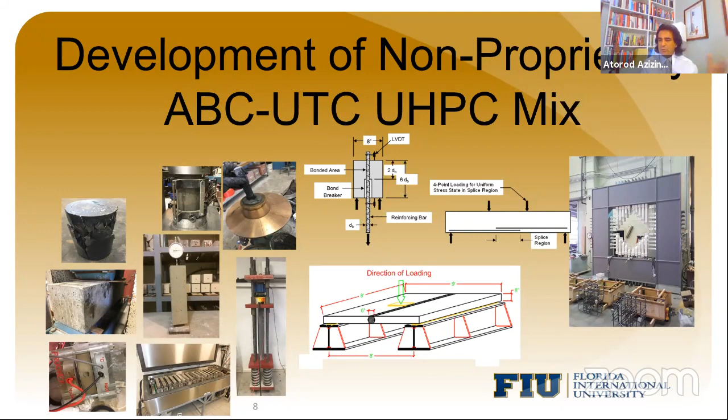This is just a chart showing that I'm coordinating this project for developing a so-called non-proprietary UHPC mix, or ABC UTC mix. The principal investigator is Royce Floyd, from the University of Oklahoma. I will give Rafael the PDF copy of my slides so everybody has it. Okay, no problem, Atorod. All right, thank you very much.

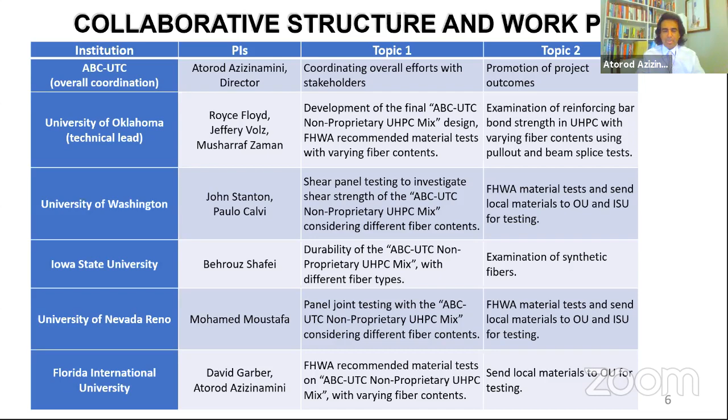You bet. So this slide shows who is doing what in developing the non-proprietary UHPC. There's a lot of testing being done—material testing, trying to optimize it, and so on. There are also different universities in our consortium doing structural testing too.

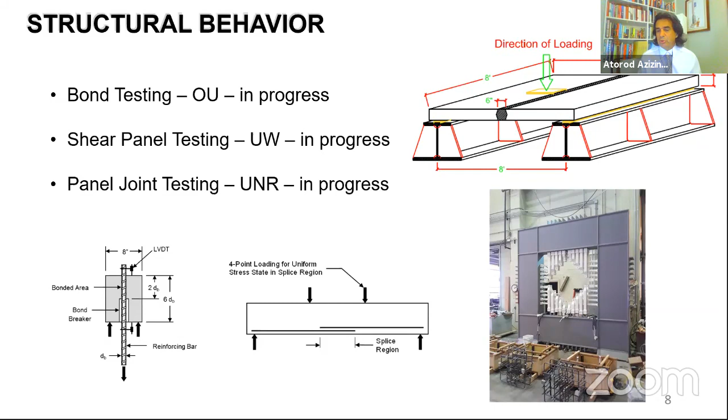So they are developing the mix, and in order to select the mix that really should be used, they're also doing structural testing, like for closure joints or a bond test and so on, and shear tests. For example, University of Washington is doing some shear tests. So the UHPC mix that we are developing is going to be available to anybody in the world who wants it, and we are making sure that its structural properties are adequate.

We are doing lots of durability testing, rapid chloride permeability, freeze-thaw, and so on. If you go to our website, you will see more detail.

If you're interested, for example, in how to make a UHPC mix, this kind of chart tells you, per cubic yard, how much cement you need, how much slag, silica fume, and so on. You can play with this, you can start with this. This will probably give you somewhere around 56 days, and probably 20,000 PSI strength. But if you want more than that, you need to beef up your amount of cement and silica fume. This is the kind of mix you can basically start with and play with.

And I can tell you the biggest cost is the steel fibers. Steel fiber is a major cost.

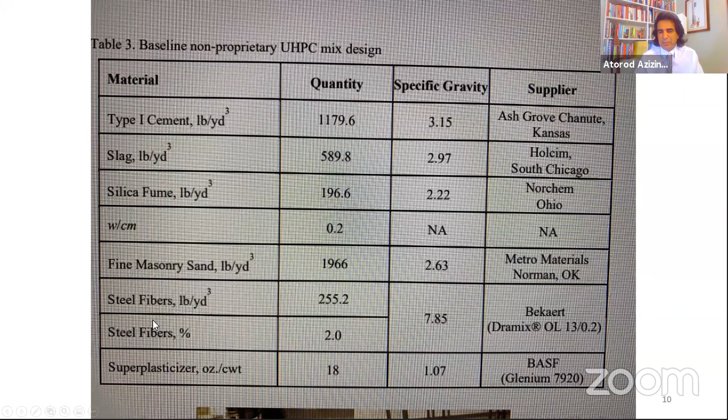The durability aspect is the main reason why we are using UHPC. It is so dense that nothing penetrates through this material, and that's the advantage. Also, it has tensile capacity, and after you form a crack on the tension side, it's not the end of the game - you can get strain hardening and so on.

This is a very busy slide, but I just want you to notice one thing: this chart is UHPC, and this chart is just normal strength concrete. The horizontal axis on both is the number of days the samples were exposed to salt water. The vertical axis represents the level of corrosion taking place. So after 450 days in the UHPC, you will see very small corrosion activity, but in normal strength concrete, it's several times that.

So UHPC's durability aspect is the main thing, and because in our bridge structures we do want a very durable material so nothing penetrates through it - and we've done, and lots of other people have done, lots of work with UHPC too - it's an extremely durable material.

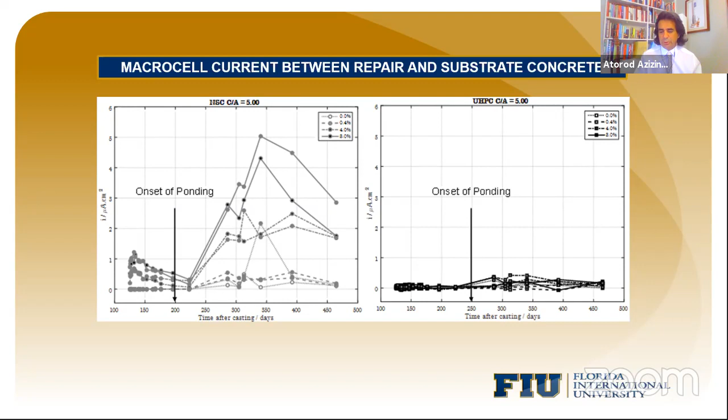Now let's come back and discuss the application. From this point on, we are going to discuss the application of the UHPC.

One of the areas of interest to us is if you have a prefabricated column and a prefabricated cap beam - like here, for example, here's a bridge, this is the column, this is the cap beam. You can prefabricate this and prefabricate this, bring them to the site, and then connect them together. Right now there are lots of connections available, and most of those connections are basically just making a hole and going through.

So if you make a slight mistake, and if everything doesn't fit, then you are in a world of trouble.

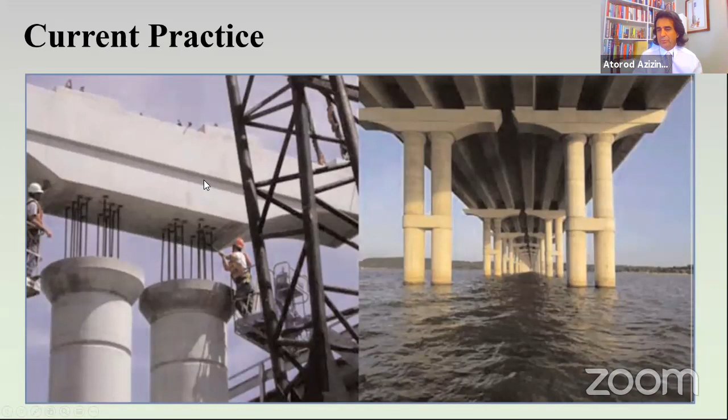So there are also these couplings that you can use in order to connect them together. Again, these are not cheap, and you have to make sure that everything fits - if it doesn't fit, then you're in trouble.

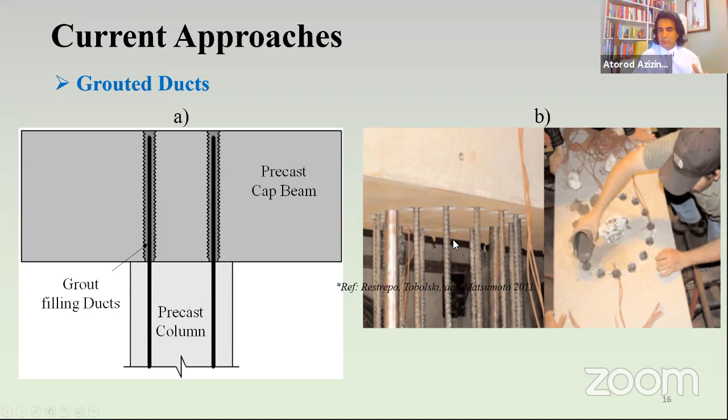This is the so-called duct method, where you make a duct, pass the reinforcement through, and then fill it. Again, tolerance is very important in this connection.

There's another one that we call a socket. So there's a pocket, and then there's a socket. Socket is basically you make a hole, and then you just insert the column inside of it.

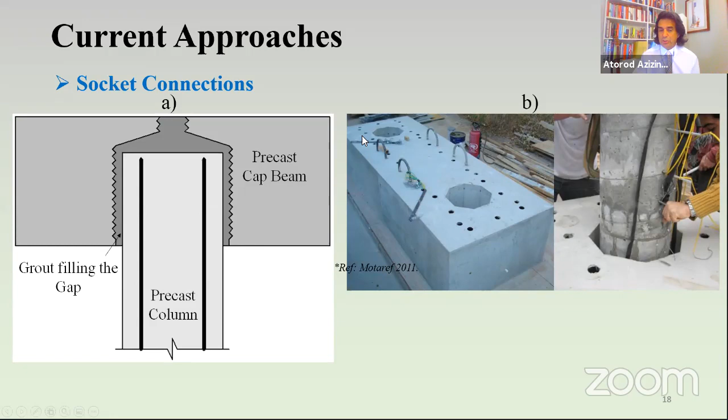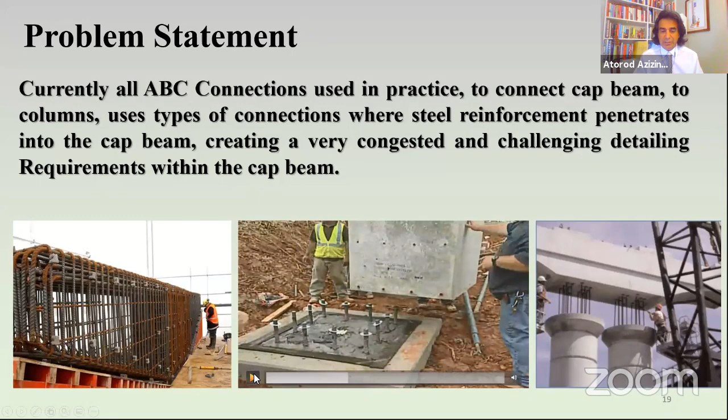Again, in these cases, you have to push lots of reinforcement to the side. For example, in real structures, if you want to put some kind of tube inside of that, it's very congested. It's not easily done. If you make slight mistakes and things don't fit, that's a problem.

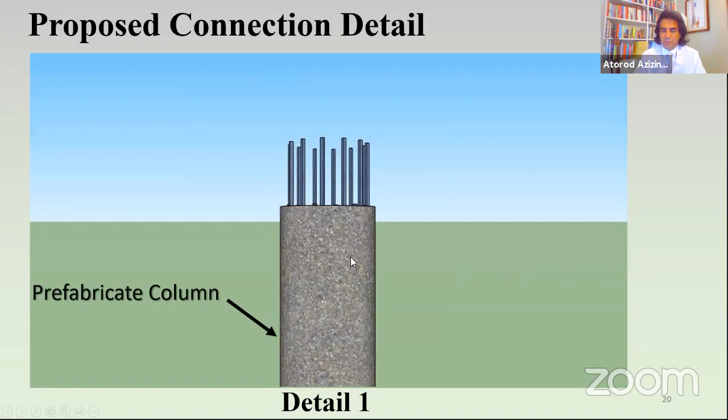So what we did, we said, okay, we are going to bring the reinforcement out of the cap beam, have your precast column, and you have the reinforcement, and then splice it with the UHPC outside. There are many advantages. This detail works for seismic and non-seismic, because in seismic areas this area is so strong that it remains elastic, and the plastic hinge forms outside that.

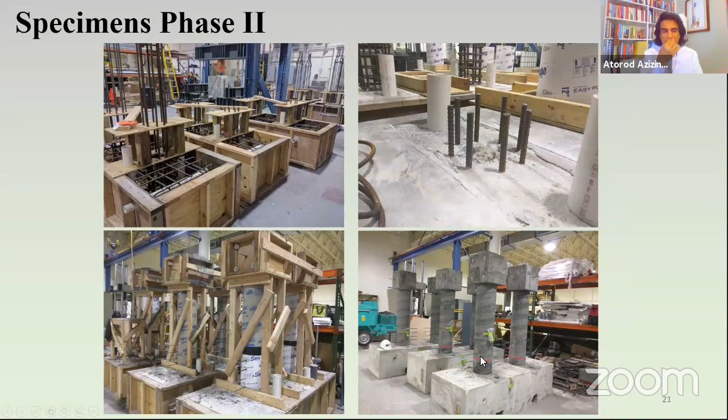So we did lots of testing. Here it is, for example, precast column, precast cap beam, and then trying to overlap them. So we tested, and damage is always outside the connection area, and that's what you want, right? Because you don't want any damage in the connection area, and this kind of detail achieves that.

Here is a number 5 bar, number 6 bar, and this is just normal strength concrete. So our design criteria is very simple. The length of the splice is only 8 times the diameter of the bar. So that's this length, the overlap, splice length.

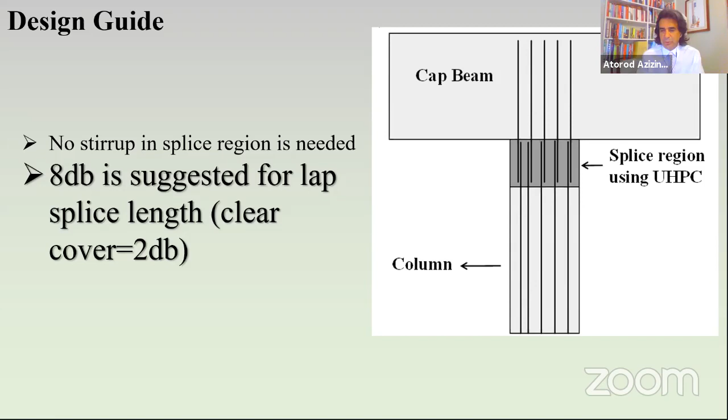The other thing is that now you don't have to worry about the tolerances, because you just connect them together and fill with UHPC, so you don't have to worry about the tolerance. Now we do have procedures on how to, in the field, hold the cap beam while you pour this. I'm not showing that here, but contractors can come up with many different ways. We do have one way that we have suggested.

Another big area that is really attracting lots of attention is retrofit. I'm pretty sure in Brazil you have the same concern, because there is not that much money to replace all the deficient bridges. We have to retrofit, we have to repair most of them. In the US, we have the same problem. You cannot replace every bridge that is deficient, every bridge that shows this kind of corrosion and so on. You cannot replace it, you have to retrofit.

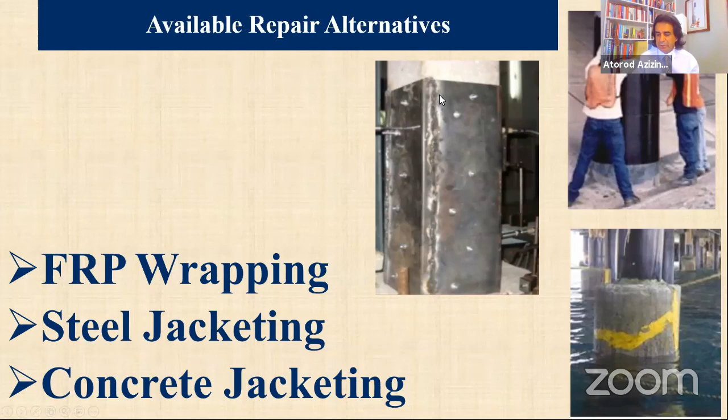So this is an extreme example. We can do a bunch of other things with UHPC, for example, let's say a column. Right now there are a number of different ways that you can retrofit columns, like wrap it with a steel jacket or concrete. But UHPC is really, in my opinion, the way to go. So we built many test specimens, and intentionally we introduced some damage. Basically, we cast the column, but then we left part of it uncast. In fact, we spliced some rebar, assuming that some rebars are going to be corroded, so we're going to have to cut it and then splice it.

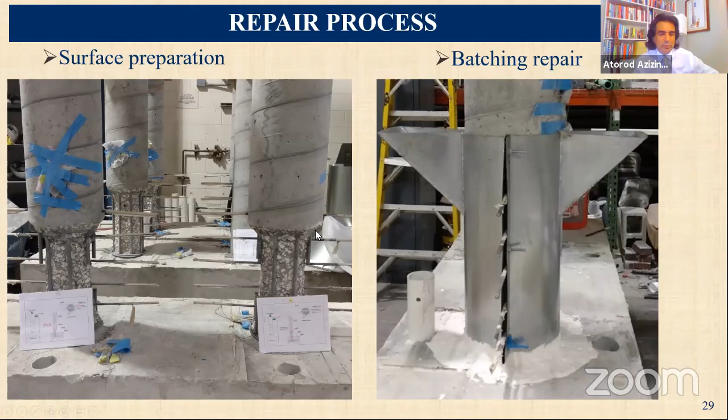Where the UHPC is touching the foundation, that UHPC is going to crush that concrete.

So the solution is that if you're retrofitting, you also have to retrofit maybe part of your foundation, or the slab that the column is sitting on, because that UHPC is so strong that when you apply load, it's going to crush that normal strength concrete. So you're going to be careful.

The other thing is you have to do some sectional analysis just to make sure you know what the moment capacity is here, what the moment capacity is there, and the moment capacity at the junction, so you can design it so that the failure is at the cross section that you want.

And it really doesn't take much UHPC thickness. This is a 12-inch diameter column. Only 1.5 inch UHPC causes the failure mode to go from the repaired area back to the top. So it's a wonderful material, and you don't have to use too much of it.

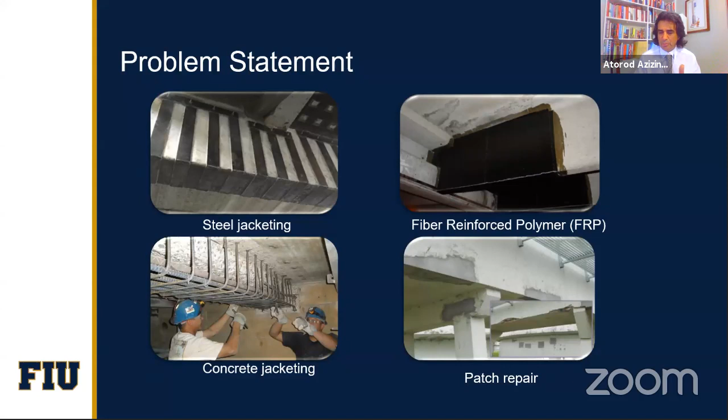So here is some of the stuff that you can use right now for retrofit. But forget about all that. Use the UHPC. Don't use the FRP. Don't use steel jacketing or concrete jacketing or patching, something like that. We've done lots of work, it's on our website, you can take a look at it.

What we did in our test specimen, we used sandblasting to get an exposed aggregate. Now, that's very important. If you want the concrete to attach to the UHPC, you need to expose the aggregate and then wet the surface for 24 hours. You can't just hose it right before casting the UHPC, that's not going to do the job.

What you have to do is get an exposed aggregate, then wrap it with wet burlap and keep it for 24 hours. That will allow the moisture to penetrate the normal strength concrete, because otherwise there is very little water in the UHPC, and that dry concrete is going to soak everything out, and you're going to get cracking. So that's a very important aspect if you want to use UHPC for retrofit.

We have not tested this one yet, but about a year ago, we took a T-beam. We said okay, now we're going to use 2.5 inches. We put some reinforcement, and the top is 2 inches, the side is 1.5 inches. There were two objectives: one, we wanted to see whether we can cast the UHPC and have it go all the way around.

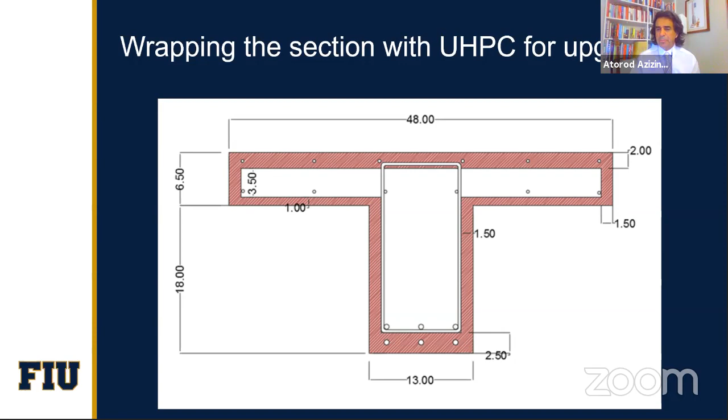And then after that, we are doing lots of corrosion testing, trying to see an intact bond between the UHPC and the existing concrete. We did one more thing, very interesting, because I wanted to see whether the UHPC that we're going to wrap can go through a small space.

So what we did, we built a formwork out of glass. And here it's a wet burlap, making sure that for 24 hours it stays wet. Then we put the T-beam inside the glass formwork, and we put the UHPC on one side to see if it goes all the way around. Here is the result.

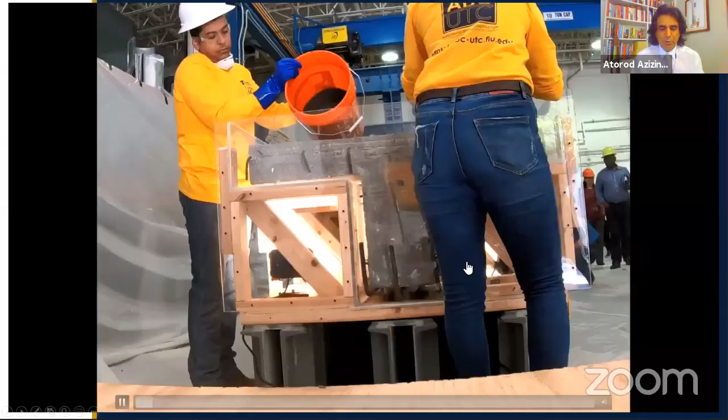In fact, we had two mixers, and one of them broke during the casting, so it took us 6 hours to cast this. It was actually a good test, because everything bonded together even though it took 6 hours to cast it.

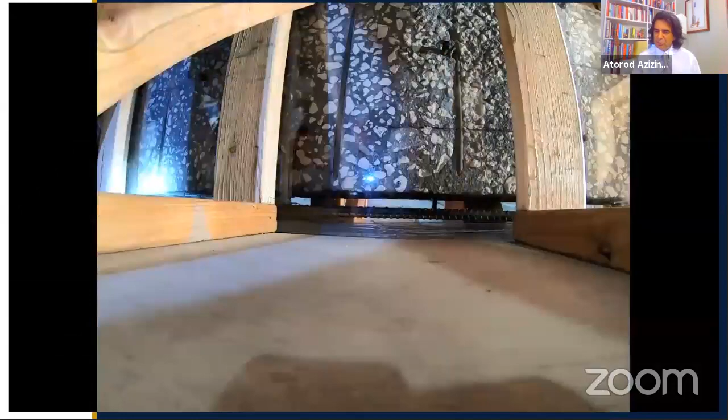So you see how everything is basically flowing. There was no honeycombing. The UHPC was going through that small space because in UHPC there is no coarse aggregate, it's all very fine sand, and because of that you don't get problems with honeycombing.

There's another very interesting feature: after we remove the glass formwork, the surface is just like glass. It's really wonderful stuff.

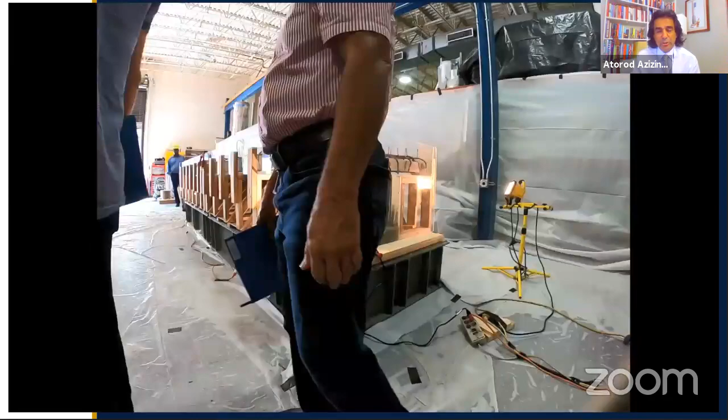So here you can see how the UHPC is coming up. We are pouring from the top, and this thing is just coming up very nicely. And that's the finished product - no problem, it's a wonderful material. You can wrap the whole beam in UHPC if you want to.

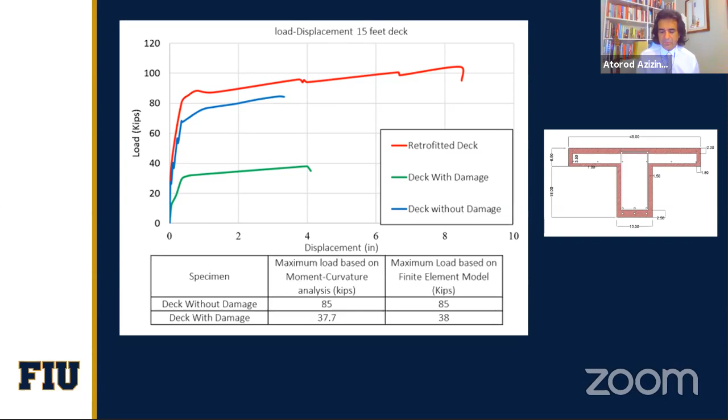So that's some of the retrofit work. We also have a very interesting concept when you want to build structures - I think I have it here. So what do we usually do? We have a formwork, right?

You build the formworks, put the steel cage inside, let it cure, and then you have to come back and remove it. That's a very costly process - it costs labor, it costs time, it causes interruption to traffic, and a bunch of other stuff.

So what we have done - it's a new technology we're developing - our formwork is made out of UHPC. So we have a formwork, let's say for a cap beam, or formwork for the column, and then you bring it, stack them on top of each other, put the steel cage inside, and then fill it with regular concrete.

Now you can also actually fill it with lightweight concrete. Why? Because if the shell is made out of UHPC, nothing penetrates through it. So therefore I can use lightweight concrete, I can make my section smaller, my total weight gets smaller, my foundation size gets smaller, and so on.

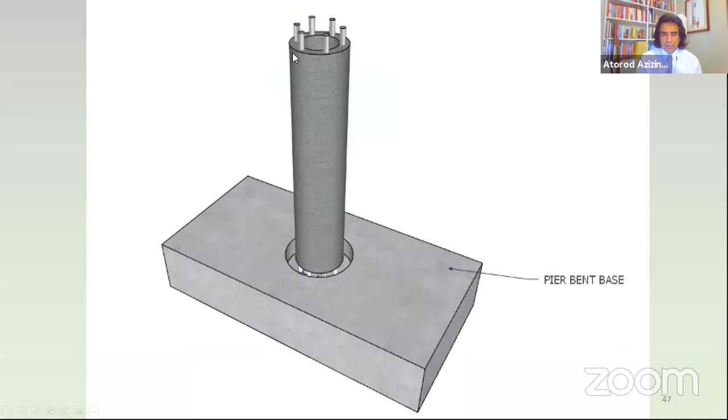So this is a conceptual cartoon that shows what we are doing. Here you can see, basically, the shell for the column, and then you can stack them and connect them, put the steel inside, and then fill it. So you don't have to build the formworks - you have something that's going to last many, many years, and you don't have to remove anything after you cast it, okay?

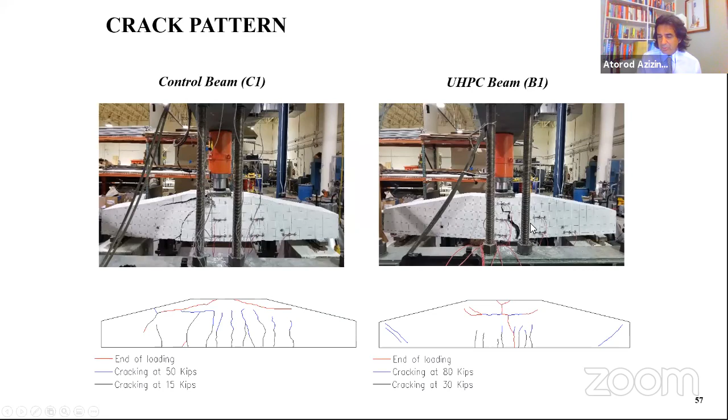We thought that ribs would give a composite action. That was not the case. As a result, we had one big crack in the middle, but still we had a higher capacity. If I look at this specimen from the bottom side, what you're seeing is the top. If I go to the bottom, you can see that the normal strength concrete is separated from the UHPC shell. So those ribs don't do the job.

You have to do something else. So for the material that you pour inside to get composite action with the outside shell, you have to use some mechanical devices. If you want to cast normal strength concrete against UHPC, you have to use a mechanical device. If you want to cast UHPC against normal strength concrete, all you have to do is have an exposed aggregate like I showed before. So there are two different types of problems: casting normal strength concrete against UHPC needs a mechanical device, and casting UHPC against hardened normal strength concrete just needs an exposed aggregate. Those are the two principles you have to watch.

And here, for example, in one specimen we built the shell out of UHPC, but then we put these mechanical devices, and then we put the steel cage, then we poured the concrete. And we tested it. Now we got good behavior - the UHPC shell and normal strength concrete behaved compositely.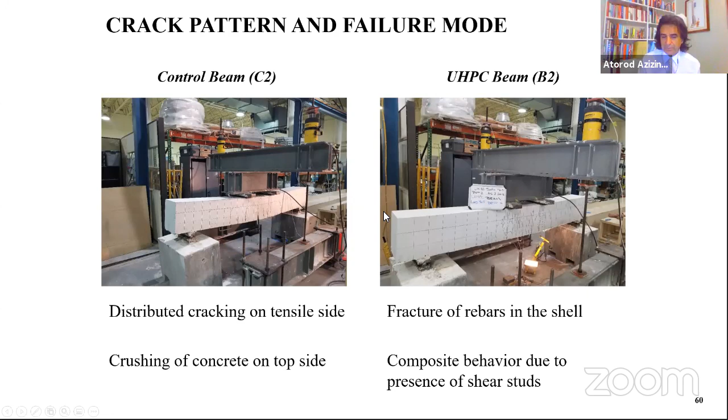And this is the behavior. This is a beam, same size beam. The normal strength concrete has a low deflection. This is a UHPC shell filled with normal strength concrete. You can see that you get a very ductile behavior, a much higher capacity, and so on. So I reached 60 kips versus about 35 kips in this case.

So that's it. This is what we call ABC - an accelerated bridge construction concept, because you bring these shells to the site, stack them on top of each other, and fill them with concrete. There's no formwork, and there's no maintenance because UHPC doesn't let anything go through it. So it's a wonderful way of doing it.

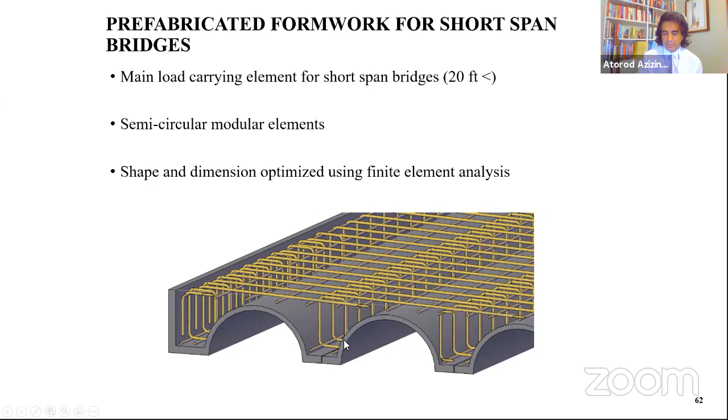We have some solutions, for example, for short span bridges. So you build a formwork in this shape, and then you can bring these, put them side by side, put the reinforcement in, and fill it with concrete. We built some of these modules, filled them with concrete, and then tested them. Everything works fine in this case.

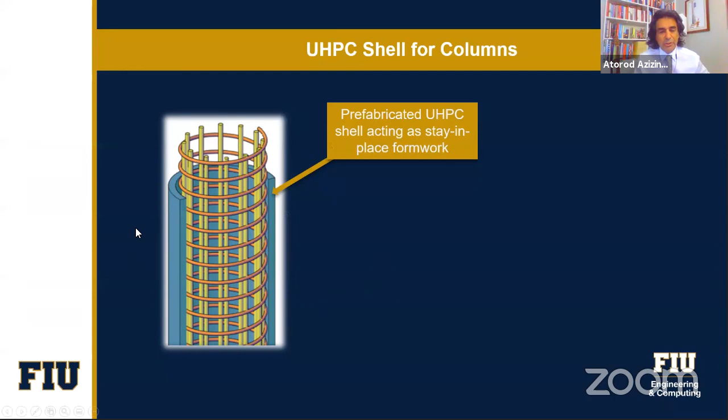So the other thing, with this concept of the formwork being a shell, we played around with the UHPC for the column. What we do is we have the shell made of UHPC. You put the reinforcement, put the shell on top of it, and then fill it. And then we have some details for the connection of how to connect this to the foundations.

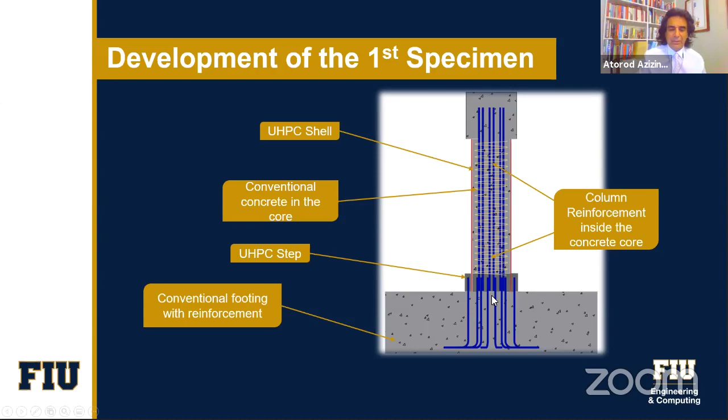Basically, the reinforcement comes out like this. And then the reinforcement that's inside, and then there's a ring that's made of UHPC. That's how you basically connect the shell to the foundation. Here, as you can see, in one of the test specimens, the reinforcement is coming out, and then there's going to be reinforcement inside, and then they're spliced here.

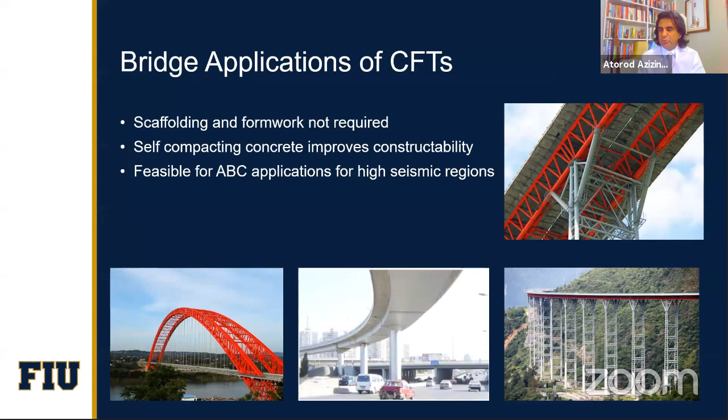Now, if you have a long column, it will be difficult to make a very long UHPC shell. If you have a long column, what you can use is concrete filled tubes. So steel tubes filled with concrete, connected to the foundation using shear studs and these rings right here.

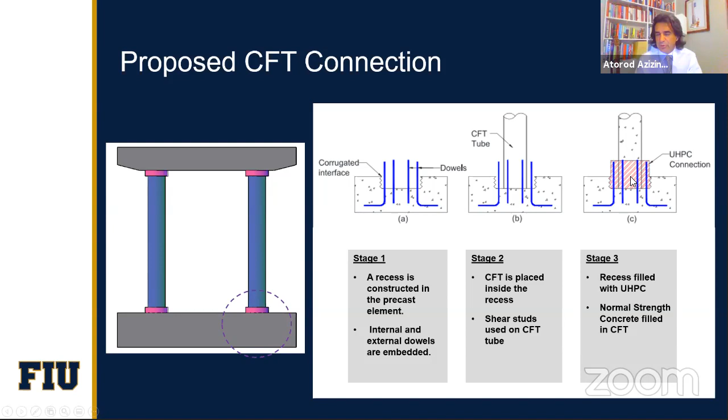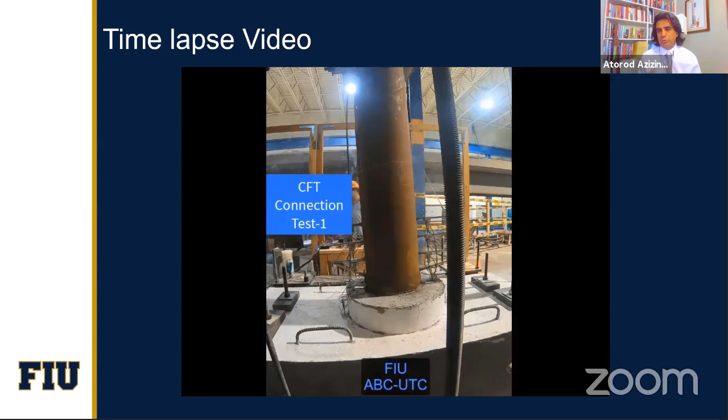So if you have a very long column, 20 meters or whatever, just use steel tubes, but then you can use a UHPC shell for a cap beam. And here's another one.

These were tested, fortunately, before COVID-19, because right now we are in the lab working, but we have to have no more than 2 to 3 people at a time in the structures lab. So it's been kind of disruptive for us.

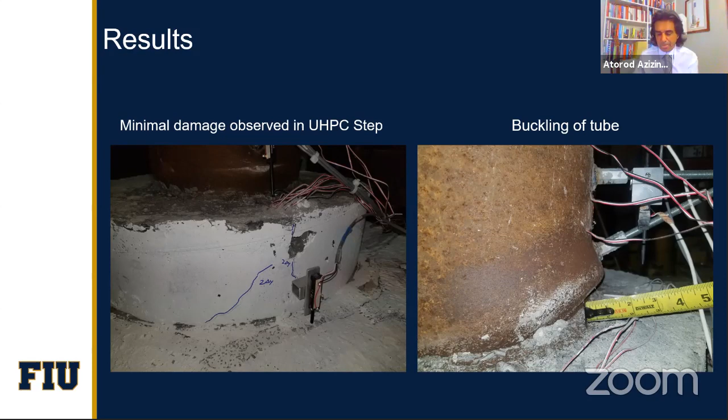And this is it, basically. So the connection works. Again, everything we do, all the connections, is connecting everything using a UHPC. That's what I'm saying - even though the material is expensive, you don't use too much of it, you don't need to. Here is some shots showing the failure is right outside of this connection area.

Every day we try to find some applications. So in the US we have lots of bridges that have used timber piles. I don't know in Brazil if you have it or not. Rafael, do you guys have lots of bridges with piles using timber piles, wood piles?

Yes, we use a lot of wood here in Brazil. For the columns too? No, for all the bridge. In the outback part of Brazil, like Pantanal, or in the center part of Brazil, some roads have bridges that just use wood. Okay, good. So stay tuned Rafael, because I'm going to be asking you some questions too - so pay attention, don't fall asleep on me. No problem. I know Rafael for many years, so that's why I'm teasing him a little bit. I wouldn't joke with anybody else, but I know Rafael, so he knows me, we play with this. No problem at all.

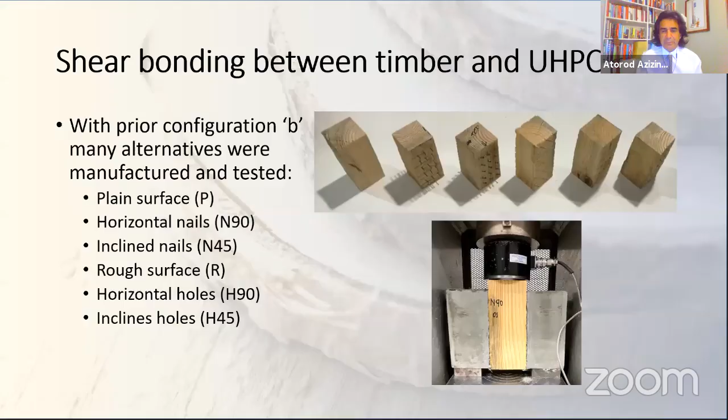So we've done a bunch of tests, trying to put the nails at different angles, do an interface shear type test. We've done a bunch of stuff, but our conclusion is that the best thing is just to put some soft material, wrap the timber pile with the soft material, and then cast the UHPC. Then you should be fine. In the US, the states that have timber piles are very interested in this, because this is providing us with lots of good options, effective options to retrofit some of these bridges that have timber piles.

Now shifting, there's another thing in ABC, accelerated bridge construction, the barrier system. This barrier system on the side of the roads, that's important. So we have developed a connection detail. You can prefabricate this much of it. The deck is already there, already cast in place or precast panels, and then you can connect them with the UHPC. I don't have lots of details, but if you go to our website, you can see the details. The gist of the story is that we have developed a really neat connection detail that you can connect a precast barrier system to a precast deck system with the UHPC.

This one is really interesting because the UHPC is going to be a little bit above the deck, and that's what you want, because during snow removal, if you don't have this area, the water can penetrate at that junction. So you have to have exposed aggregate here before you cast the UHPC, and that area is going to be sealed because this material, nothing penetrates through it. There's a lot of durability problems if you use normal strength concrete, but with UHPC you won't have that. So this is a very interesting solution, and in fact this one is not updated - this area actually goes all the way to here.

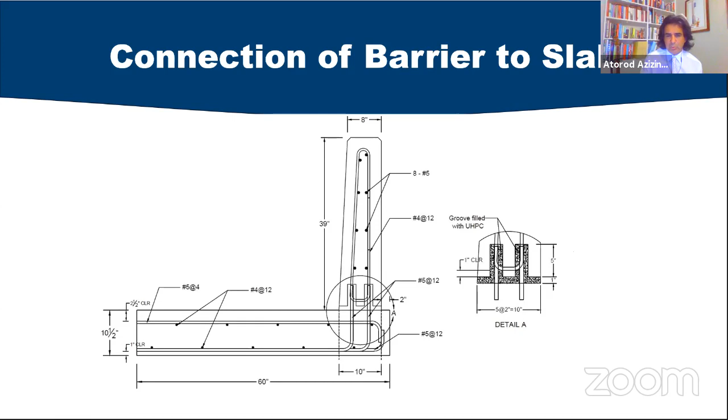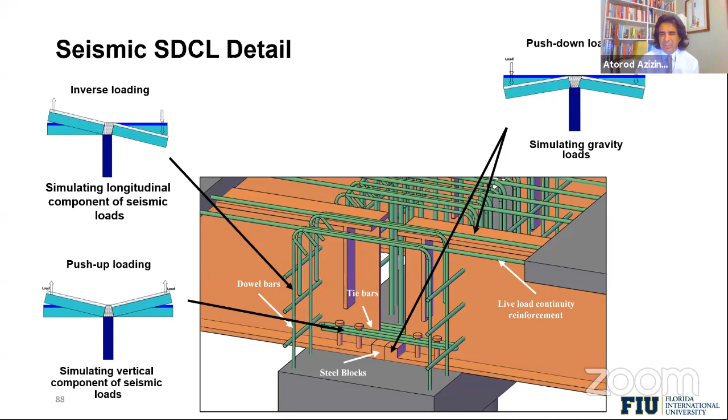If you go to our website, you will see there's much more information on this. Let me skip that - I'm not going to say much about this right here. Some of you have seen, for example, there's this steel bridge system that is called simple for dead, continuous for live load. It has a very complex detail for seismic regions, and we are replacing all that with the UHPC. I have one PhD student working in this area, so I won't say too much about that. If you're interested in this system, I can provide you with more info, or you can look at the website.

All right, now let's look at the future. Now what I'm going to tell you, it's not science fiction. The robotics in bridge construction is coming fast. In the US right now, the military is spending billions of dollars on using robots for construction - they take raw material to the field and then they print it.

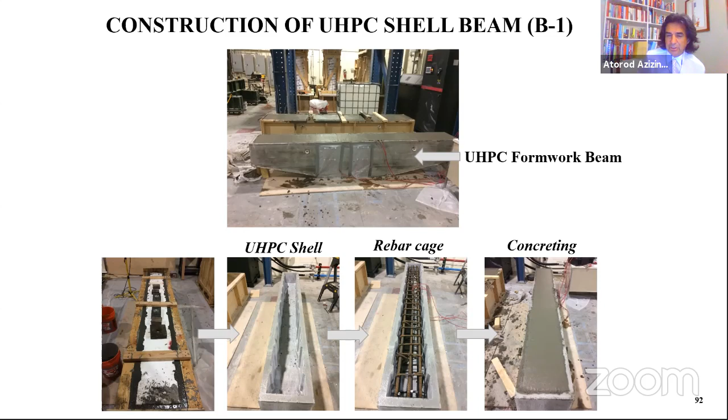What we are doing now is that UHPC shell that I told you about. Now imagine your formwork is made of UHPC. Now imagine one step further - we are going to print it with robots. Now you're taking the labor out. It's going to be really fantastic. So what we have done...

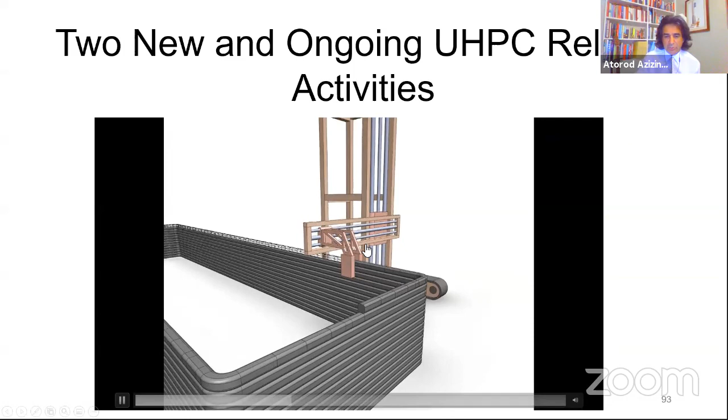Here is a kind of cartoon, but this is a reality - we actually have the system. The idea is that we cast these things layer by layer. Let me show you how we deposit this. This is a chute - the UHPC comes over here, and it's a layer by layer fabricated construction. There's a sheet over here, like a cooking sheet, that prevents the UHPC from sticking to the side. You can't see it, but there's a plate here that heats up to about 120 to 125 degrees Fahrenheit. So as we move along, let me see if I have...

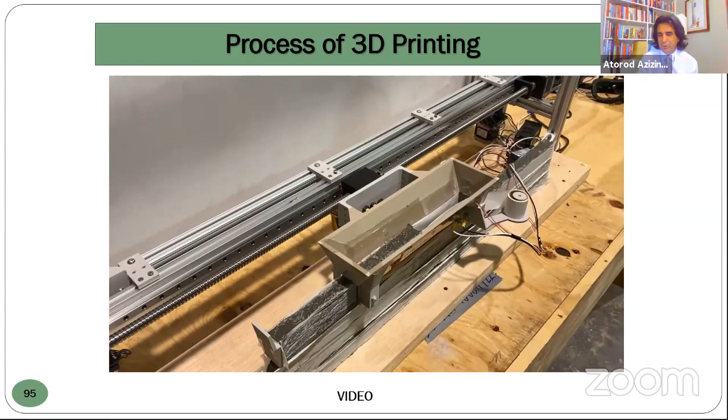As we move along, there's heat over here, and that heat makes the concrete harden faster. This is a small model just for the exhibit that we have. We are not there yet for commercial use, but it's coming. It's not brain surgery, but this application of robotics is coming really fast.

Over the next several years, we are going to be focusing on using robots to build components of the bridge, because this printing is well suited for accelerated bridge construction, since you can print these large pieces on site. Here's the advantage: you cut the cost of transportation. There's no reason why we cannot print these elements near the final site of the bridge.

So you don't have a transportation cost. You can use local forces, you can use local material. Imagine that—it's not reality right now, but it's coming fast. My feeling is that within the next 10 to 15 years, we are going to be there. Imagine you just ship these robots, and you have the material in there. They can mix it, and they can print it, and there you go with the UHPC shell. You've got the formwork, you stack it, you fill it with the concrete, and you're done. So this robotics is coming fast.

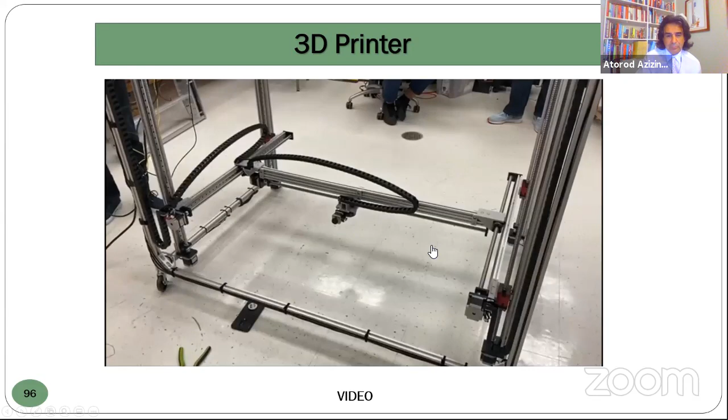Another thing we are working on right now—you've probably seen shotcrete—we are developing robots that can go inside the pipe. Inside the pipe, it can detect where the crack is, or just put a liner, a UHPC liner, moving along the length and then applying the UHPC or shotcrete. This shotcrete, I think, is going to be one of the main applications of UHPC.

It's even used for bridge overlay. Imagine I have this kind of problem—now imagine if I go back with the shotcrete, I just spray it, just like a hose, sprayed.

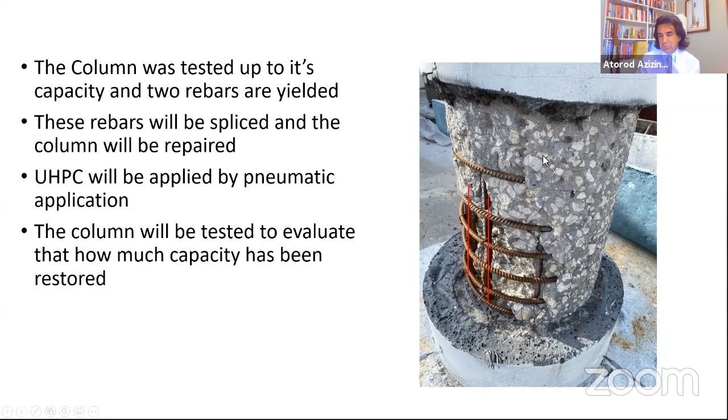We have developed a mix that is suitable. We have this specimen—in fact, we were supposed to do this back in May, but because of COVID-19 it was postponed. We are buying a device so we can spray. We're going to be spraying the UHPC on these specimens, and even some of the columns that we tested for retrofit, we have ready. Then we're going to spray the UHPC and test it again to see what happens. So shotcrete is one of those things that's coming fast.

They are looking at this more from a business standpoint, acting like this thing is so difficult to do. It's not at all. The shotcrete with the UHPC is a simple thing to do, not that difficult. We are working in that area, hopefully that should be available soon. I think that application is for retrofit, because remember, we don't have that much money to replace every bridge, whether in Brazil, the US, or everywhere. This shotcrete is a wonderful way of basically trying to use it for retrofit.

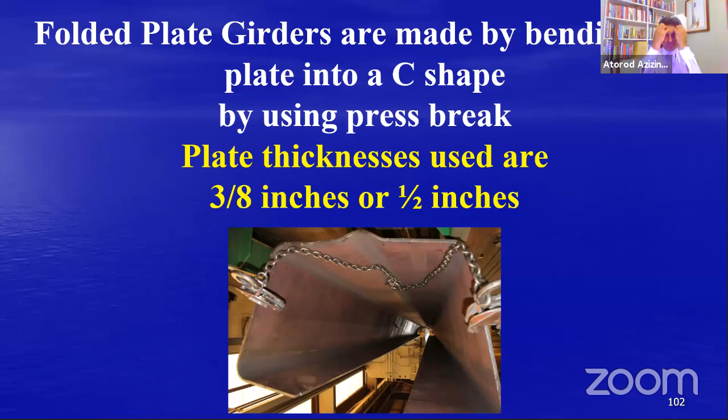I wanted to share with you - I think Rafael knows about this system called the folded plate technology, but what Rafael doesn't know is that now we have a second generation of these things. This system is for ABC. So what you do is you take a piece of plate, you bend it to a C shape, okay? This is proprietary, patented in the US, and if anyone is interested, we can help them implement it. Then you use the brake, basically press brakes, to bend these plates. The bottom is open, so it's a C shape.

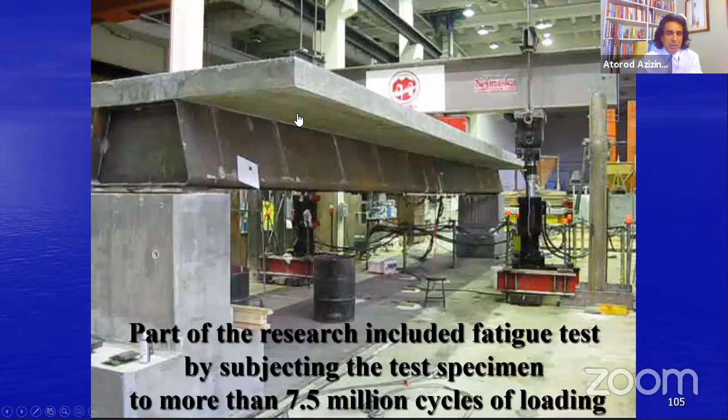And then you cast a deck on top of it, and then you ship several of these to the site and put them side by side, for example. So far there's about 12 of them across the US that have been used. But up to now, everything is limited to 60 feet because the press brake is limited to 60 feet, okay.

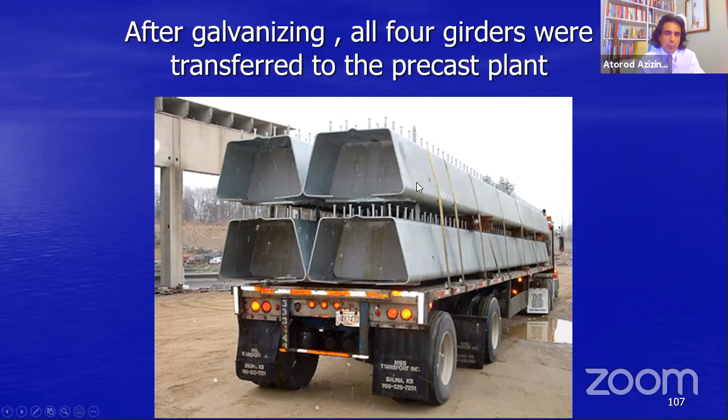So you bend the plate, galvanize it if you want for water, for corrosion, and then you cast it, you ship it to the site. You can build the formwork, cast a deck on top of it, and then ship it to the site. You can pick it up with a crane, very light - it's not that much weight - and then you put them side by side like this, and then you join them over here. We have a much better closure joint detail nowadays.

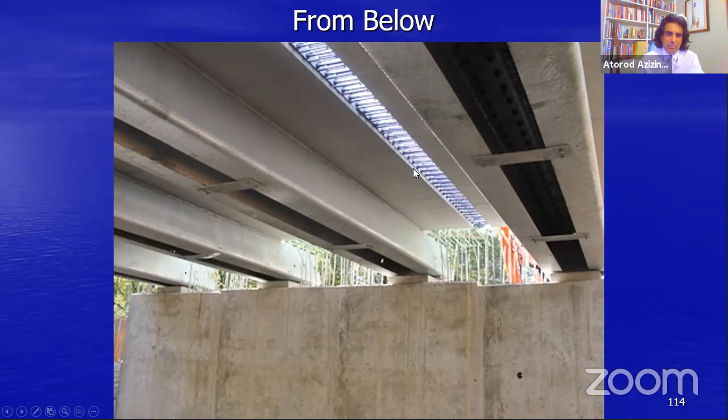This is the first one that was used in Uxbridge, Massachusetts, back in 2011. It was opened to traffic in 2011. But nowadays there's 12 of them in service with excellent performance.

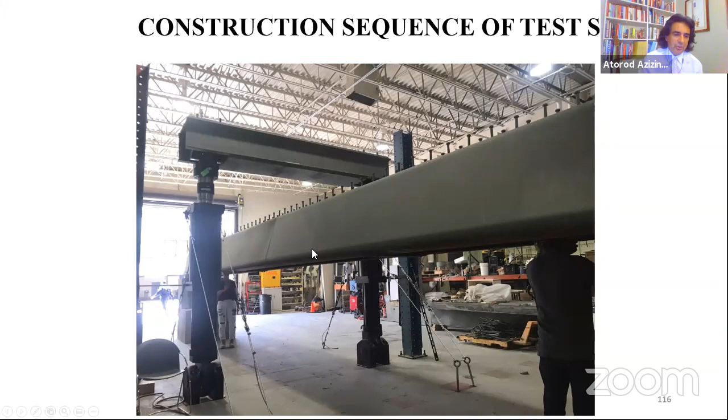Now, the second generation - up to now, the maximum length of this thing was 60 feet. Now we have developed a connection that we can connect together, and we can go all the way to 105 feet. Here is a specimen that we built - no, this is not 105 feet, we wanted to test the connection. And then we did a cyclic testing, you can see.

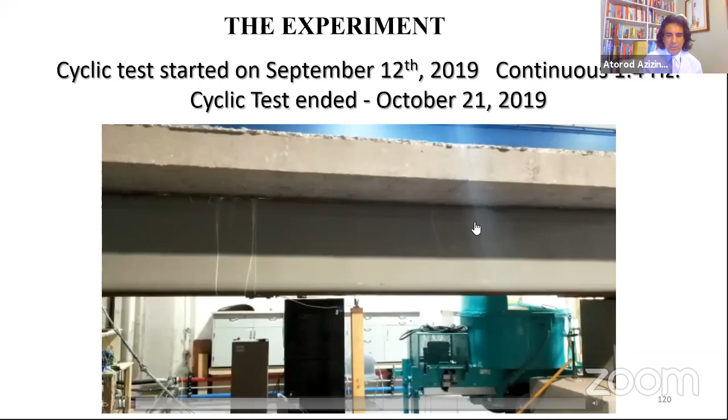Now, this one was almost, I think, 5 million cycles. We applied 5 million cycles. We started the test on September 12, 2019, and finished it on October 21st, 2019, basically 24 hours a day, that the specimen you see down here was being subjected. Each time the ram moved up and down, that simulated like one heavy truck passing over.

All right, so anyway, that system is just again, to be fair to the steel, we had that. I showed the system for shortest span bridge, for simplest span bridge, okay.

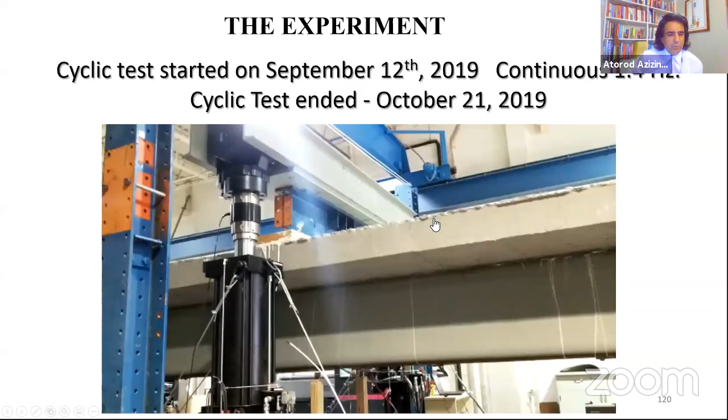And I think finally what I have before, I wanted to show this one. This is a technology that we have, and I believe you guys have the same type of problem in Brazil too. Rafael, you do have bridges that you worry about how to inspect them for corrosion, right? Especially when the steel is inside the concrete, correct?

Yeah, okay. Well, if you have that problem, we are working with a colleague of mine in Germany. I've been working in this area for 20 years, and my colleague in Germany has been working 30 years. So 2 years ago, we decided to join our forces, state-of-the-art technology to inspect the status of a steel strand embedded inside the concrete. Now, this technology - we are not really publishing all the details, there are secrets of the trade, and we are discussing right now with the university to form a company, and we are going to be providing a service.

There's many states in the US that are really interested in this technology. So it could be a parking garage, it could be a bridge, segmental concrete bridge, pre-stressed concrete, anything that you worry about. You say, okay, what is the status of the steel inside the concrete? If you are worried about that, this technology is for it.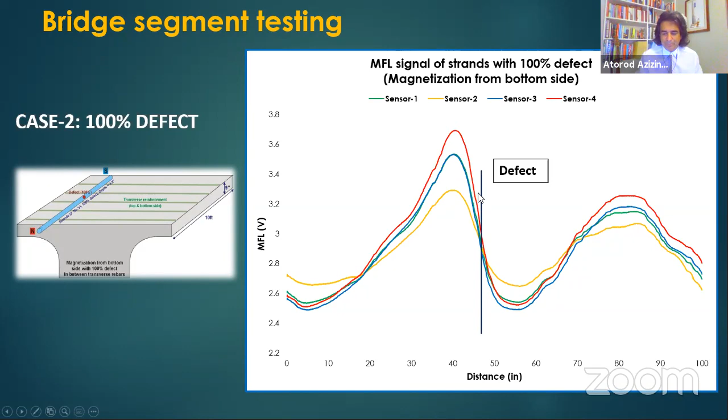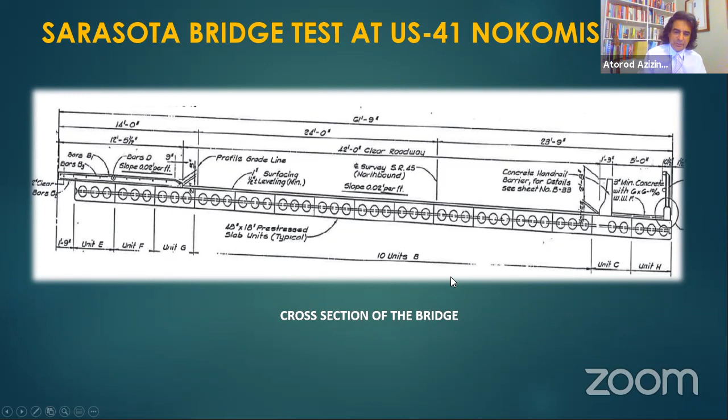There was a bridge that we just recently tested, and we are going back actually August 13th or 14th, we're going to test some more. This bridge is made of, along this length, these modules that you can see. This goes along the length, okay? These modules have a post-tensioning rod that goes transverse. This is perpendicular to traffic. Traffic goes toward the page, and then the post-tensioning rods are in the transverse direction.

So the post-tensioning rod goes along the transverse. A couple of them actually were ruptured, and we are able to basically say exactly where these things are.

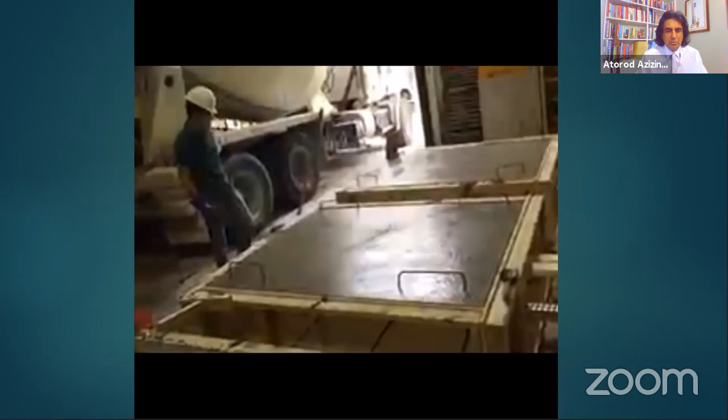Now, what we did recently, we built a full-scale model of this bridge, a segment of it. We built a full scale, and 3 of them. We put all the reinforcement that there is, all the reinforcement that there is, and then cast the concrete.

And then put them side by side. This is it, this is like the traffic goes this way and the post-tension rod goes this way. It's a full scale. You see over here, one of the holes has a metal duct and the other one doesn't. And we put the holes in different locations so that we test our technology.

Now, let me show you some of the results with this. So we put some post-tension rods, but we put the damage, we basically cut the rebar for 4 or 5 inches, simulating the corrosion. And by the way, cutting the bar section versus it just being corroded is the same thing, because when it's corroded, you have an iron oxide, which is non-metallic, so it doesn't make a difference. But let me show you the results.

So imagine now I'm going to put a post-tension rod, and I'm going to put some damage, intentional damage, on the post-tension rods.

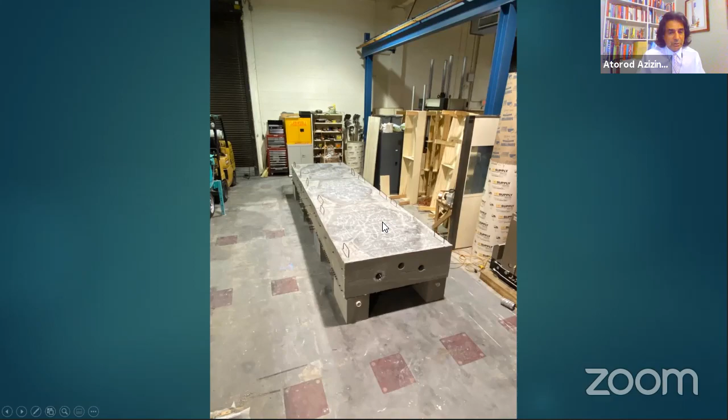And here's the signal. I mean, you cannot get any better than this. We are able to exactly say where it is. So this technology is applicable to both, let's say, parking garage or any steel element that's embedded in concrete, and you want to know what the status is, this technology is available.

I wanted to show this one because I know that Brazil is dominated by concrete structures, not so much by steel. And corrosion is the main problem. There are lots of collapses that take place because of corrosion.

The bridge that collapsed in Italy a couple of years ago, that was because of corrosion. And it happens more often than what you think. I think we are going to see problems with our bridges across the world failing because of the corrosion. And this technology is really state of the art in the world.

There's nobody else doing this. What we have solved is how do you section the structures and how do you zoom into the area that you want and wash out the effect of the mild reinforcement, okay? And this is it. You cannot get any better than this. I'm seeing exactly what it is.

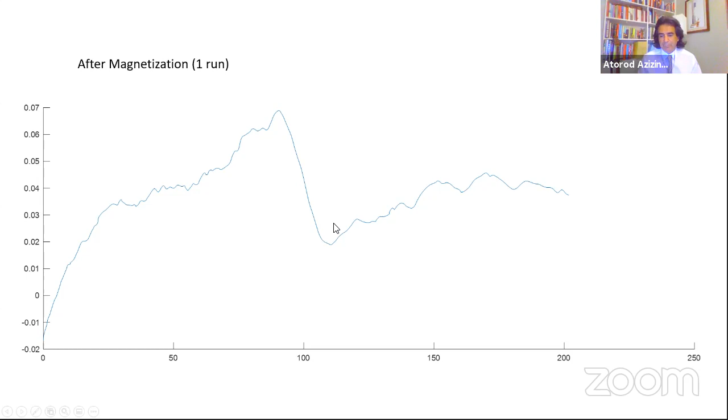And if I take the x coordinate of this point, x coordinate of this point, subtract that, that's equal to the thickness of my bridge section. So anyway, that's the end of the technical part.

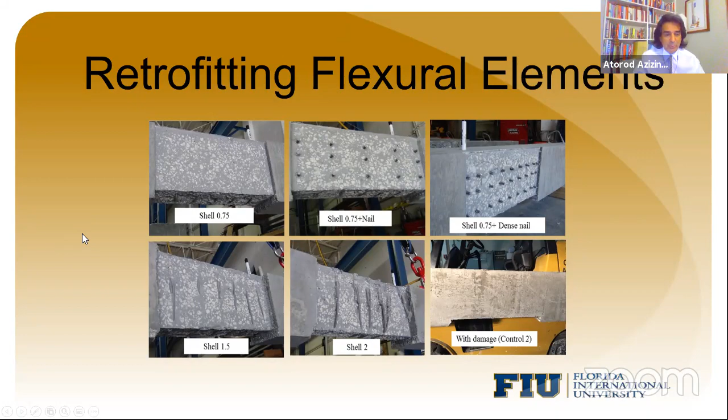This right here, okay? For example, here you wrap it with the wet burlap. So this was the concrete. You wrap it for 24 hours. You have to make sure that the surface condition of the normal strength concrete has exposed aggregate and is also wet. And then if you do that, then it's fine.

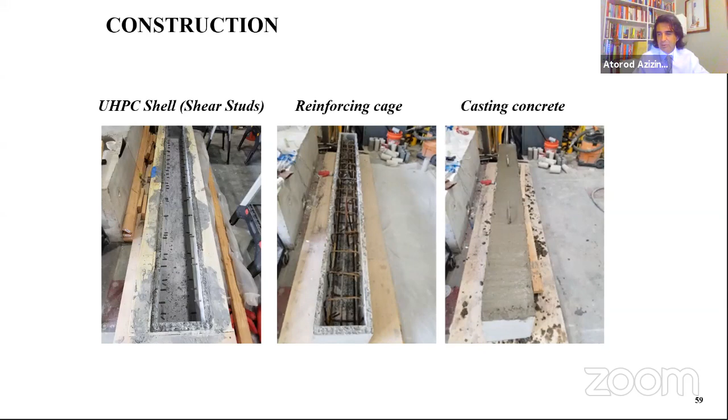So this is casting UHPC against normal strength concrete. And what I was saying, if you want to cast the normal strength concrete against the UHPC, then you need mechanical devices because you won't get the composite action. So it's two completely different problems.

But the level of roughness is not that much. It doesn't matter what kind of concrete you have, just make sure the aggregate is exposed, that's all. The shear friction is better with the aggregate exposure - it gets a really good bond between them. And the failure surface usually is not at the interface, it's away from it. It's the same as what we do with regular concrete. And the preparation of surface is the best way to assure the perfect interface.

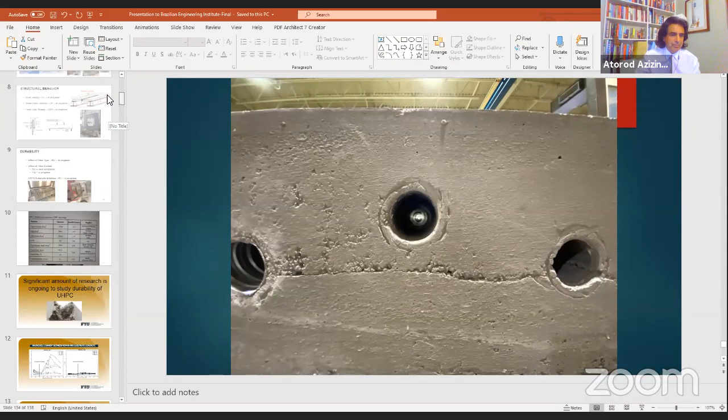Yeah, there is a base mix that I showed you, okay, that you can probably use as a starting point - this mix that I showed you. But if he sends me an email, I can put him in contact with Royce Floyd at the University of Oklahoma. There's also - let me show you one more thing. Maybe that's it.

I'm going to show you, make sure that if you go to this website, okay, I'm gonna show you where to find that. So this is our website. If you go under research, then OU research projects, there is a project here, development of non-proprietary UHPC mix. If you look at the June progress report...

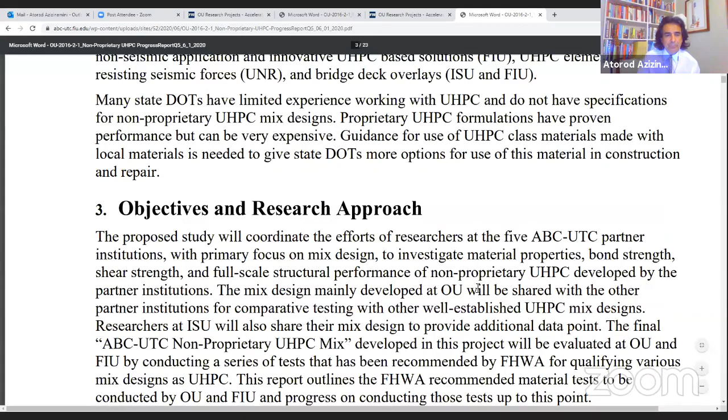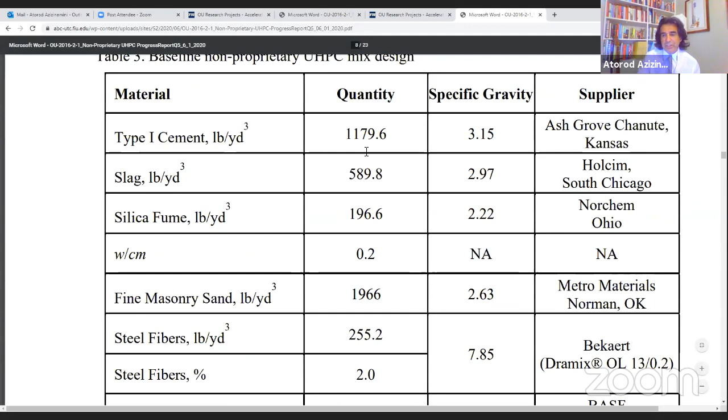Here you will see a procedure outlined on how to go about developing a UHPC mix. And I can put you in contact if they send me an email. These are some of the tests you have to run, and the ASTM test you have to do. And then here is the mix itself, that's a base mix.